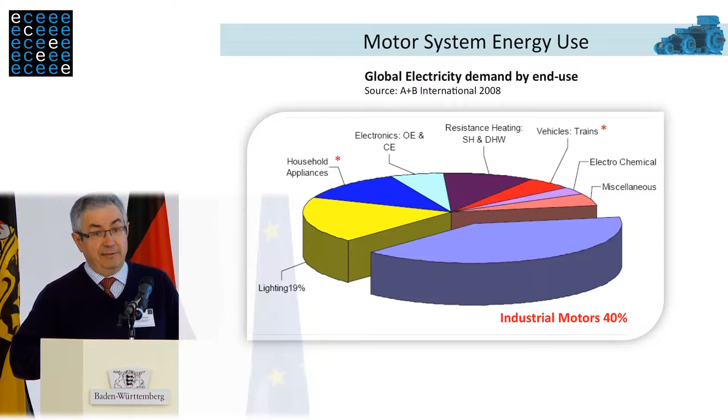Motors are one of the most important types, if not the most important type, of electricity consuming equipment. Industrial motors in industry and in buildings consume about 40% of all the electricity which is generated. And if you take into account appliances like refrigerators, air conditioners, heat pumps, the electricity converted by motors is well over 50% of all the electricity generated.

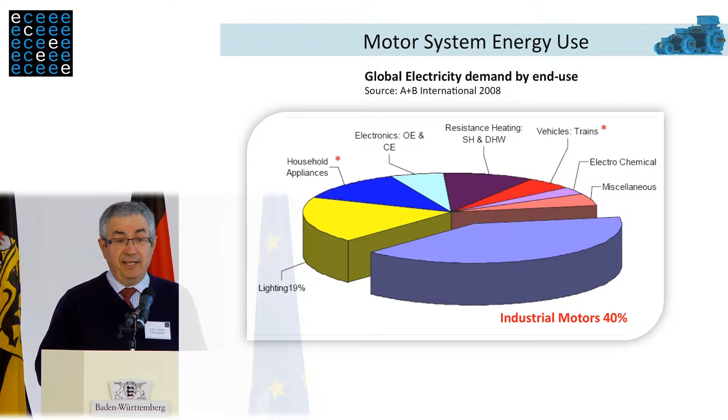Also in transportation, trains, but also other forms of transportation, are moving more and more to electric mobility, since the internal combustion engine is a dinosaur compared with the electric motor in terms of performance.

In industry, motors are not used alone. Motors are equipment which converts electrical power into mechanical power, and this mechanical power is used in a wide variety of processes to move fluids in pumps, fans, and compressors, for processing materials like in mills, mixing machines, for materials handling like conveyors, like cranes. So a huge variety of equipment is driven by electric motors in industry, and roughly speaking, about 3/4 of the electricity used in industry is used by electric motors.

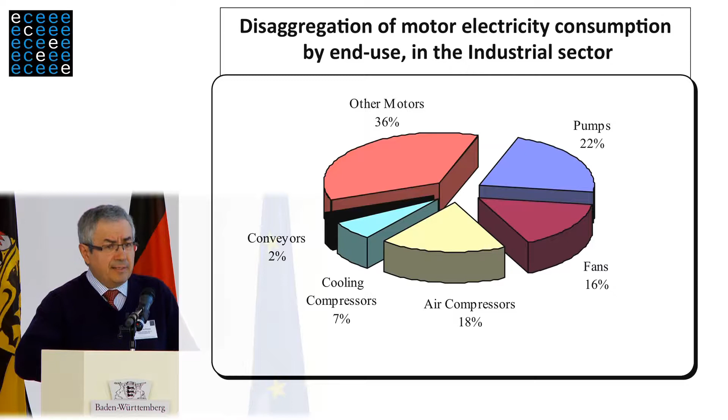Even in buildings, the so-called tertiary sector, electric motors use about 1/3 of the electricity consumed, as electric motors are used in ventilation systems, in air conditioning, in elevators. So they are still quite relevant in pumps for central heating systems, refrigeration. Not so relevant as in industry, but still quite relevant.

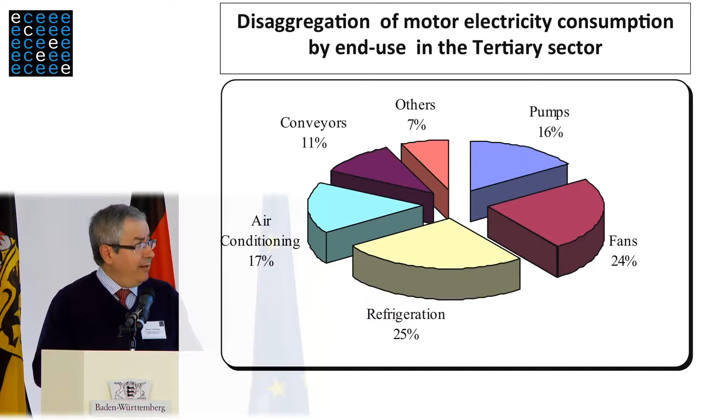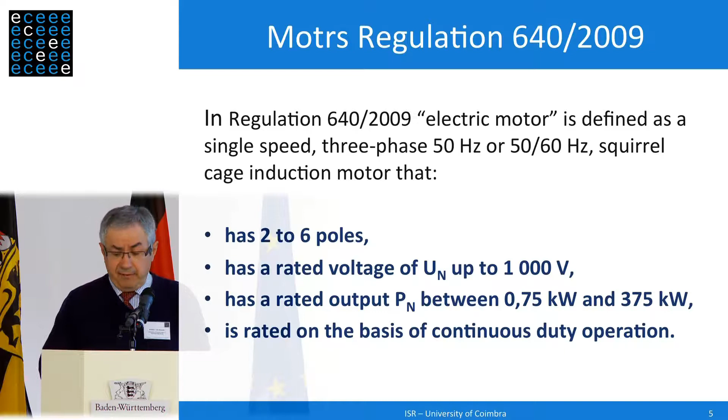In terms of eco-design regulation, in 2009 motor regulation was enforced in Europe, basically to correct a situation associated with the use of poor and medium efficiency motors in the European market. This regulation addressed the most common type of motors in industry, single-speed induction motors in a range from 0.75 to 375 kilowatts. And this regulation is working quite well, as I will say later.

Right now we are completing a study for the European Commission, which has the final meeting next Monday, and you are most welcome to attend, although you have to register. We are looking at other types of motors, and we are enlarging the power range. We are addressing motors from 120 watt, because there are many small motors which are relevant for power consumption in the range from 120 watt to 0.75 kilowatt. We are also addressing larger motors, and for the first time we are also addressing electronic controls like variable speed drives and soft starters.

As far as I know, nobody has done this in other parts of the world, to look at efficiency of this type of controllers. So basically, when we are using a motor, we have to look at a wide picture. We have to look at the system which is using the motor as one of its components. It's a very important component, but the performance of the whole system is a function of all the components that are involved. It's like an orchestra.

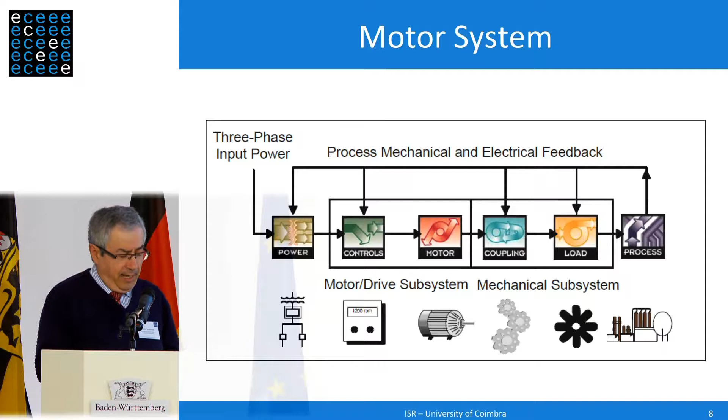So we have to look not just at the motor efficiency, we have to look at the motor speed and torque. Actually, one of the most common mistakes is that users do not take the care to understand the requirements of a particular application. The first part of design of a motor system is to fully understand the speed and torque requirements of the load. Only after this is understood can you start building your system. Many times it's the other way around.

So you have to look at the motor efficiency, of course. You have to size the motor properly. You have to look at the power supply quality, which can influence the behavior of the motor, not just efficiency, but can also drastically affect reliability and lifetime.

To look at mechanical transmission, maintenance, and last but not least, the end-use device. There is a device connected to the shaft of the motor which is performing a useful function, for instance a pump. It's very important that this device at the end of the chain is properly chosen, has a high efficiency, is properly sized, and sometimes other aspects are also important besides these.

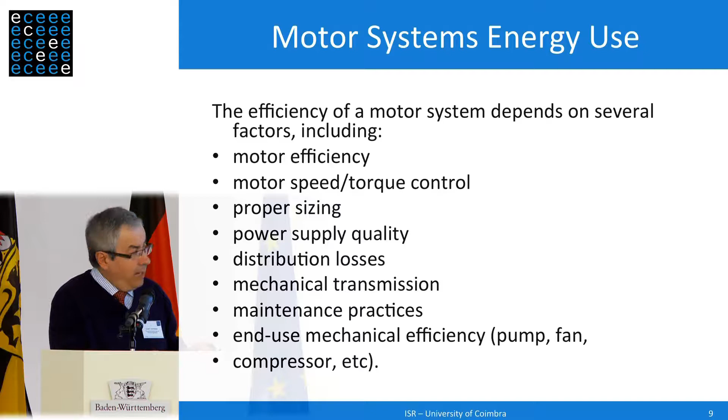This last item, the pipe, can make a huge difference. In many industrial systems you have closed-loop systems, and a large percentage of the mechanical power is lost as friction in the pipe. So if you have a narrow pipe, you are basically destroying mechanical power in the pipe.

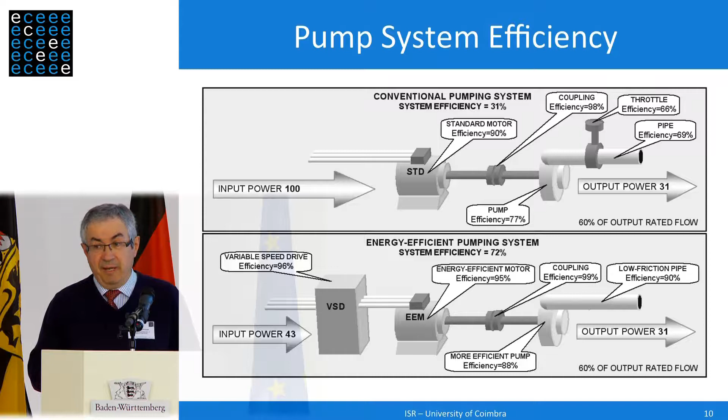So basically you need to integrate all these aspects in a good way. And if you do this, the reward can be quite impressive. You are able to save more than 50% many times when you are able to optimize the system you are addressing.

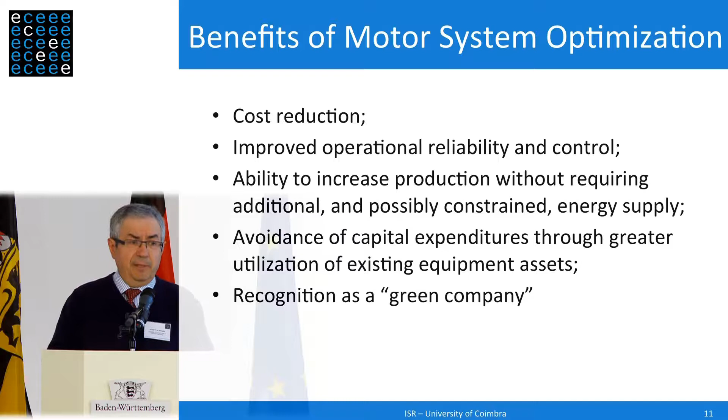The benefits of system optimization go well beyond cost reduction. Of course, if you use less energy, you are reducing operating costs. But many times with energy efficient motor systems, you are able to improve process control, reduce waste, gaining other benefits in terms of quality control, and you are also able, which is more and more important, to gain recognition as a company which takes care of the environment.

So why is this motor systems carrot not enough to drive more users towards this type of strategy? One common barrier, particularly in small companies: large companies have the expertise, but small companies many times lack the expertise. They don't have information.

Sometimes when it comes to new technologies like variable speed drives, they perceive technical and operational risks. Sometimes also within the company there are professional and functional boundaries to support energy efficiency. For instance, in companies some people are responsible for making the investments and other people are responsible for running costs, and this creates a barrier when it comes to making rational decisions. In some countries, not so much in Europe, energy prices are subsidized, so they don't give the proper message to the users.

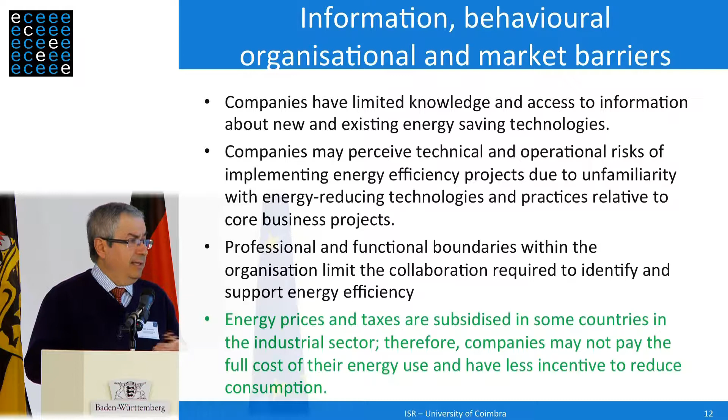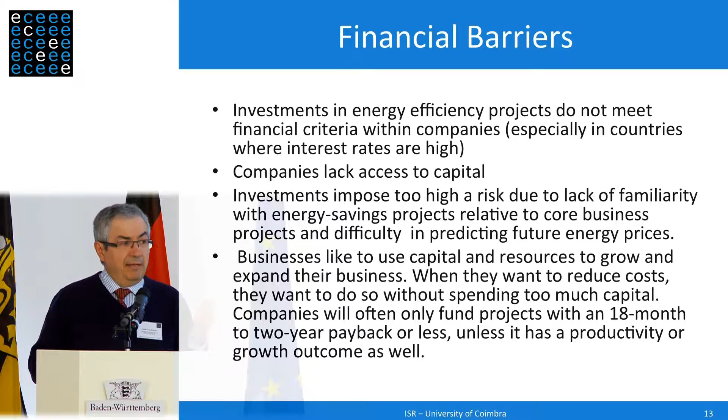Short payback times, in a situation of crisis, lead many companies to take a very short-term approach. If an investment does not have a guaranteed payback, say in 18 months or 2 years, they are not interested, and they put priorities on the scarce capital resources they have available, for instance to increase production rather than improving efficiency.

I was commenting at lunchtime that I think ISO 50001 is a very important tool to overcome this lack of comprehensive approach taken by companies to address efficiency. It's really essential to involve top management in energy efficiency policies in order to guarantee that this business is taken seriously.

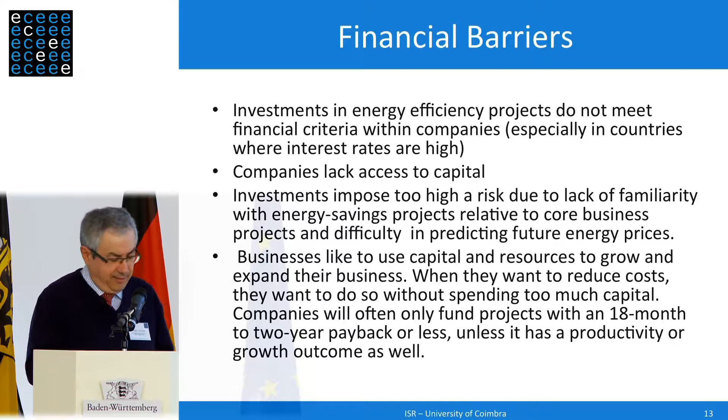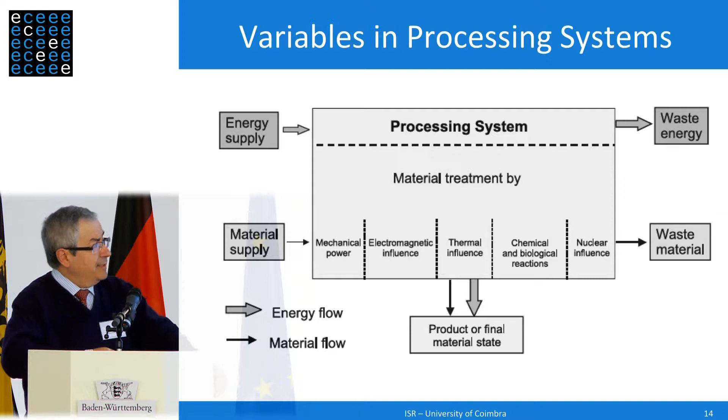So in industries, basically, you have energy flows and material flows, and what is important is to optimize both types of flows. When it comes to energy efficient motor systems, because of the improved process control, you are able to also improve the performance related to material processing - better quality control, reduced waste - these are added benefits from optimization of motor system processes.

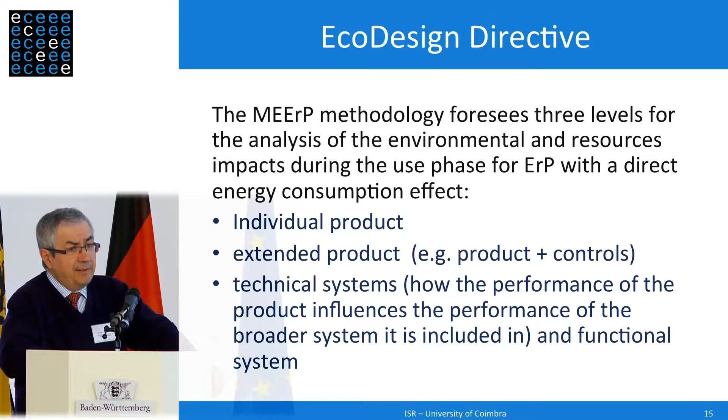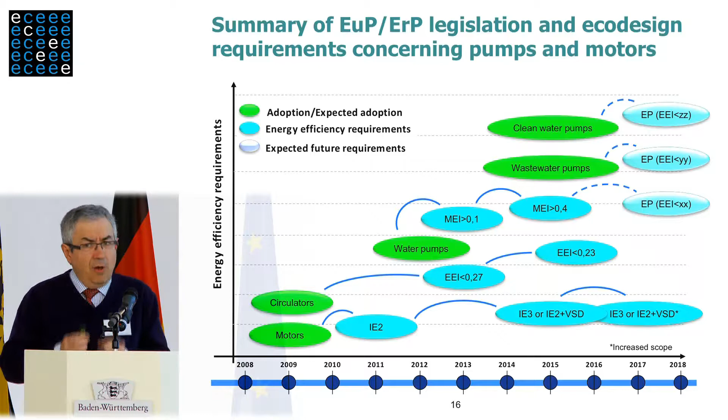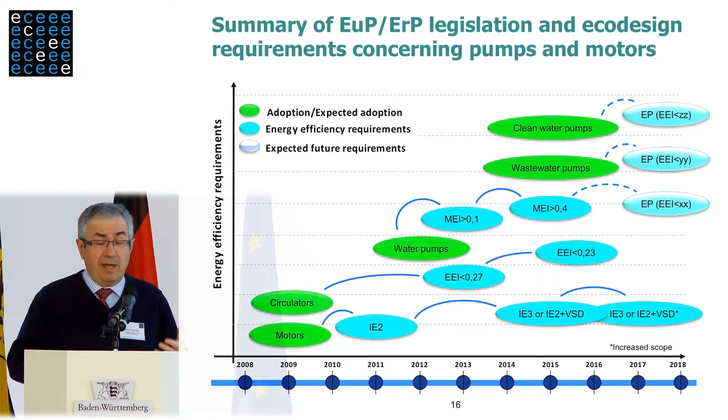The idea is that these requirements are not fixed in time, they are progressively tightened in order to improve the energy efficiency, but in all cases the energy efficiency criteria is driven by life cycle cost considerations. Considering a typical application, a minimum life cycle cost design will lead to a reduction of the costs.

This is the example of the motor situation. Only in 2007 was there agreement worldwide on how motors are tested. This is hard to believe, that only in... Tesla invented the induction motor 120 years ago. So it took 120 years for associations around the world to agree on a testing standard for an induction motor. But in 2007, this was finally agreed.

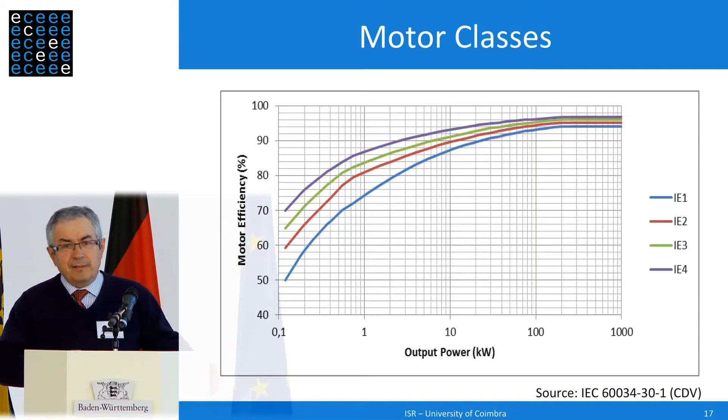After you have an agreement on testing standard, you can then classify motors, so that a motor made in Japan or China with a label means the same as a motor made in Europe. And in the last 12 years, a very drastic transformation of the market happened in Europe.

Basically, before the year 2000, two thirds of the motors sold were below the blue line. In the space of 12 years, we moved from somewhere here to the red line, which is the minimum since July 2011. In 2015, we are moving to the green line. This is a remarkable achievement that happened in a relatively short amount of time.

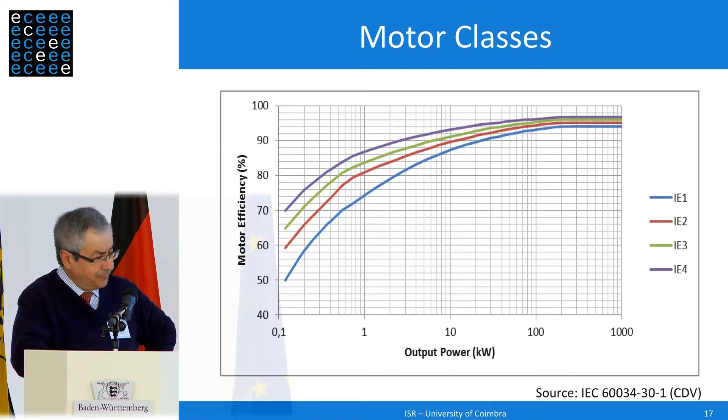In terms of motor technologies, European manufacturers 12 years ago were lagging behind manufacturers in other parts of the world. Now they have at least as good products, and sometimes even better. So this type of market transformation carried out in Europe had a positive benefit, promoting the appearance of innovative products in the European market.

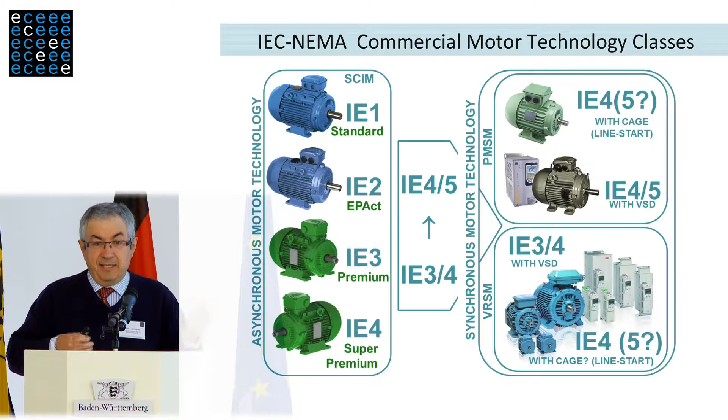I'll give you one situation. Some of these motors, for instance permanent magnet motors, have much higher torque than conventional motors. So in many cases you don't need a transmission, you don't need a gearbox. A gearbox costs money, has losses, and needs maintenance. So with these new, very efficient designs, you are able to do a direct drive system, which is simpler, more economical, and better under several respects.

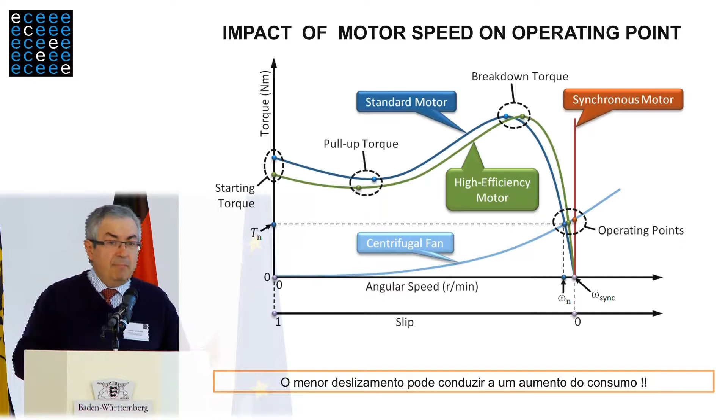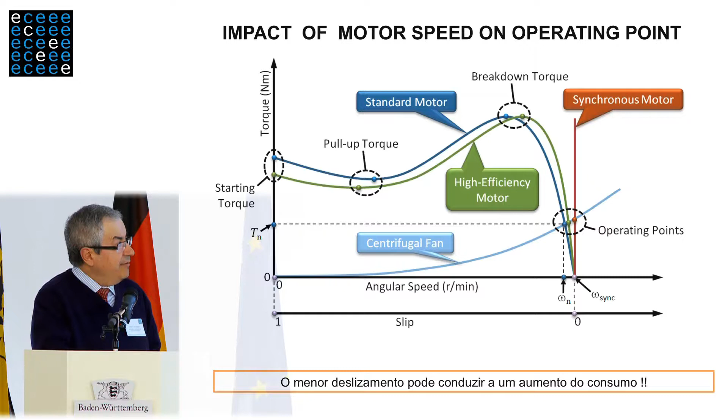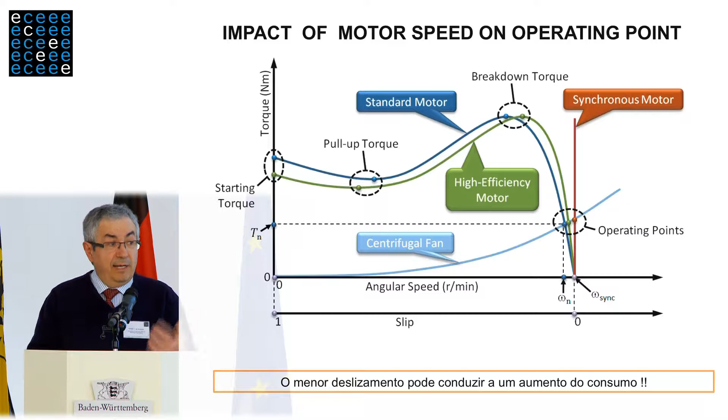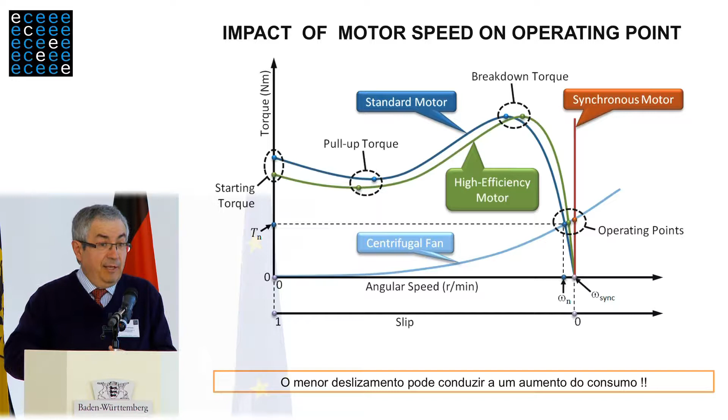Something important when addressing a system is looking at the impact when you are moving technologies. For instance, if you are driving a fan, you have the load curve of a centrifugal fan, and when you change the technology of the motor, the speed changes. It's important to be aware of this impact, otherwise you can negate the savings provided by the more efficient technology. Once you have the more efficient technology, you should be fully aware of what it has to offer - not just make a straight replacement, but find out the consequences, which in general are quite good.

One technology that by itself can have the largest impact in terms of motor system saving is the use of variable speed drives. In Europe we have a power supply of 50 hertz, in the USA 60, but conventional motors are driven directly from the main supply, and their speed of operation is related to the frequency of the main supply. With electronic variable speed drives, we convert AC 50 hertz into DC, and then convert it back into a variable voltage, variable frequency supply.

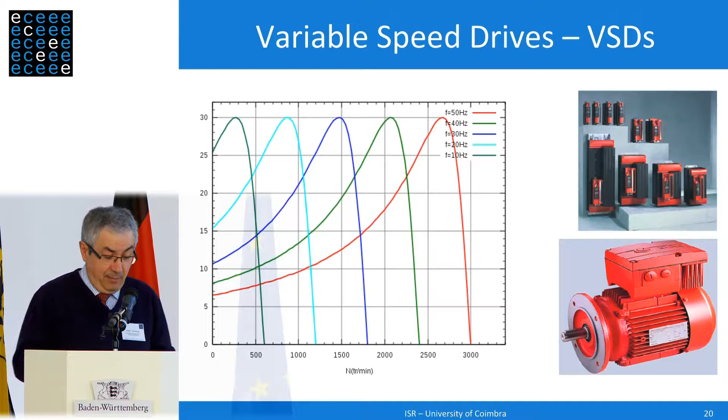By this type of supply, we are able to continuously change the speed of the motor, either to very, very low speeds - for instance, in a steel mill you can have a motor rotating at less than 1 rotation per minute - or to a centrifugal machine rotating at 20,000 or 30,000 rotations per minute. So you gain wide flexibility in terms of speed operating range, in many cases without the need for gearboxes.

One very important advantage of variable speed drives is that they allow you to regenerate power. An application where it's obvious to regenerate power is in the metro, if you are here in Brussels - when the metro approaches a station, the kinetic energy of the metro is regenerated back into energy.

Variable speed drives can also do this. For instance, in an elevator or a lift, you can do the same. So a variable speed drive on a centrifugal machine can do regeneration. In a crane pulling containers from ships, moving containers up and down, when the container goes up you need power, but when it comes down you regenerate the power.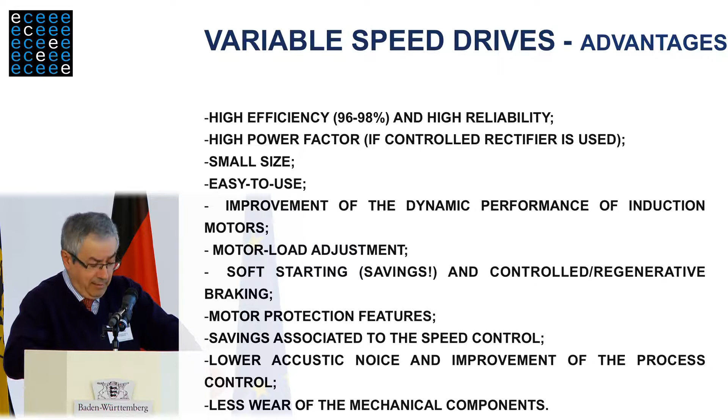So these are some of the features which allow you to improve efficiency. And because you are able to start the motor smoothly, you reduce mechanical wear of the components, giving longer lifetime of the mechanical components and higher reliability, and lower noise. For instance, in a fan, if you reduce the speed, you reduce the noise.

Something very important is how motors and variable speed drives interact - this is called the power drive system. You are connecting two components together, and the interaction between them is something that only very recently deserves attention. Some tests made in laboratories around the world prove that it's important to characterize the way a motor behaves when driven by an electronic variable speed drive.

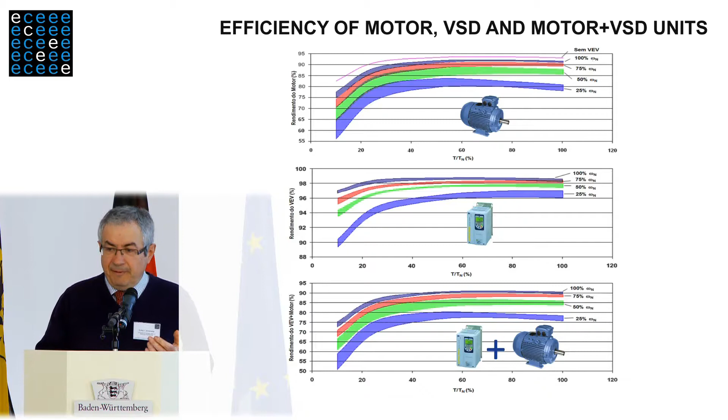You can have a situation in which the same motor plus VSD shows significant differences in efficiency when driven by a VSD made by a different manufacturer. And it's important that a standard is developed, because there is no standard to make this sort of test. Fortunately, this is being done.

So basically, the slide I showed previously is looking at the motor and looking at the drive system - looking at the power drive system. It's important that you are able to evaluate and compare how a motor performs when driven by an electronic controller. This is the power drive system standard, which is right now being developed.

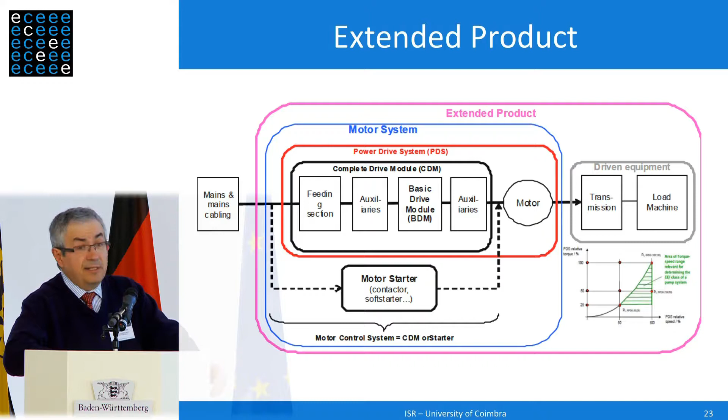But it's important also to consider when this power drive system is combined with a transmission plus a load, say a pump or a fan - this is called the extended product. So this is the methodology that is being more and more addressed when dealing with motor systems. First you address the power drive system, and then you address the extended product, which includes the end-use product.

CENELEC, the standards organization in Europe, has now received a mandate from the European Commission to develop a standard for evaluating the performance of motor plus drives. This is a very complex issue - the draft standard is more than 300 pages long.

One key issue important to assess the performance of a power drive system is to consider the energy efficiency indicators, typical energy efficiency indicators of motor-driven applications. Because when you come to motor systems, one barrier is that all applications are different, and you may reason that since all applications are different, we cannot do any reasoning. That's wrong - it's the same as a person saying, I'm not going to buy a fuel-efficient car because I don't know how many kilometers I'm going to drive.

So, on average, it's possible through the stakeholders and industry associations to identify typical operating profiles in terms of number of operating hours and load distribution. For instance, if you have a pumping system, you can say that 50% of the time it's working at 70% of the flow, 25% at 50% of the flow, and so on. So it's possible to come up with indicators typical of many situations to assess the operating merits of the power drive system.

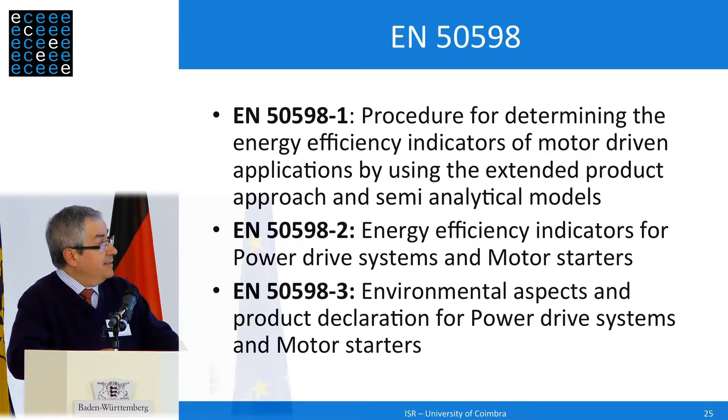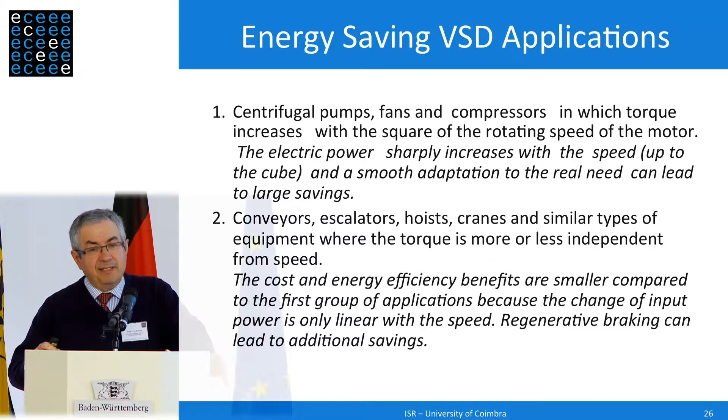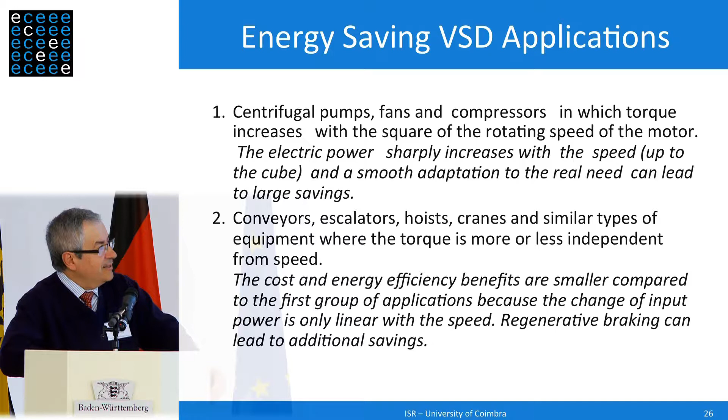So in terms of energy saving applications of variable speed drives, pumps, fans, and compressors are the most relevant. Fortunately, pumps, fans, and compressors represent 60% of all motor applications, so we can say that the most relevant motor applications can benefit from variable speed drives. But other applications like conveyors, escalators, and cranes can also benefit from this type of technology.

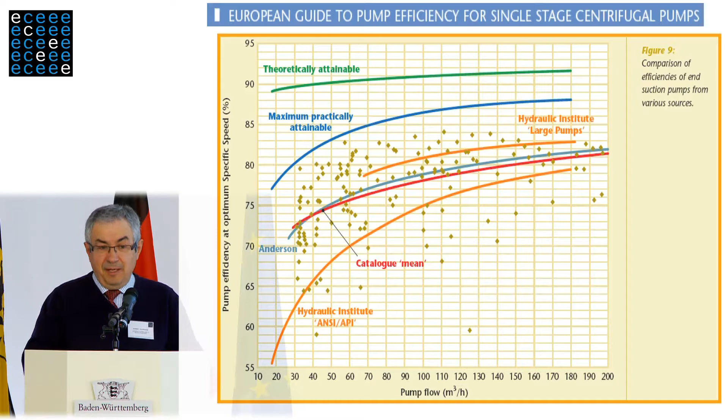This was the situation identified 10 years ago with pumps. This was a database built by the Joint Research Center, and we see for the same flow we have differences in efficiency going up to 10%. So this identified the need to develop pump efficiency standards.

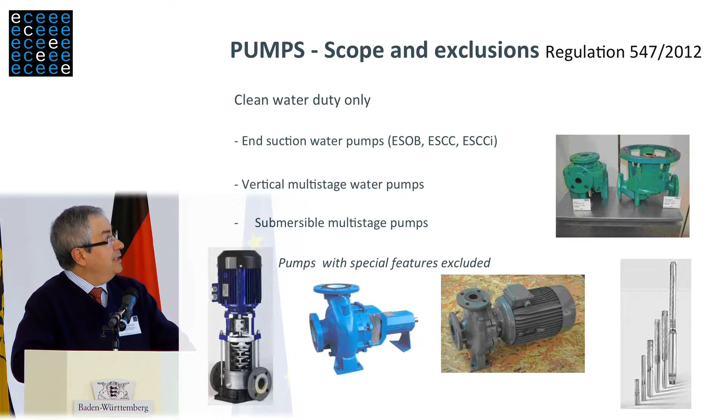These new regulations address clean water pumps and circulators as well. There is new regulation being prepared to extend the scope of this regulation because pumps are so important.

With pumps, something also very relevant to know is that the pump efficiency is strongly dependent on the operating point. So it's not just enough to select an efficient pump. It's extremely important, essential, that you are able to design the system so that the pump is close to the best operating point. Otherwise, you are wasting your money.

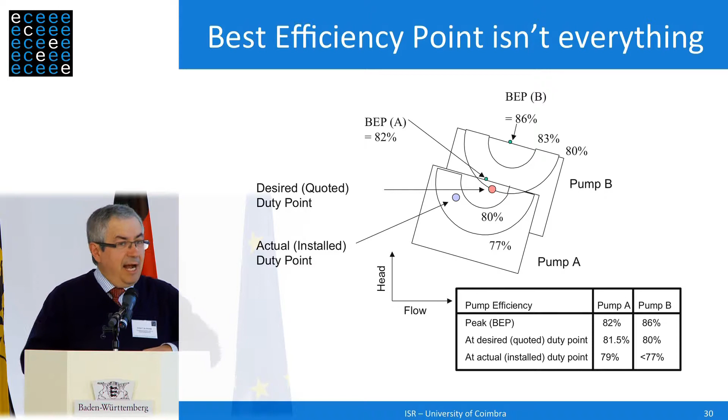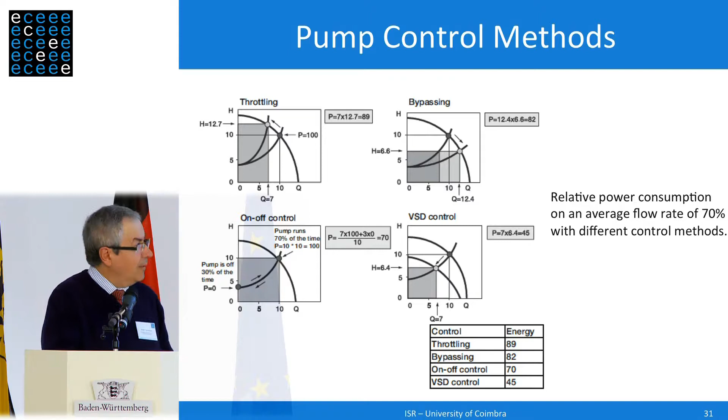Circulators is a success story. Circulators is an example of an integrated product. Basically, in energy efficient circulators, you have an energy efficient motor, the pump, and the electronic speed controls, all integrated in a single unit.

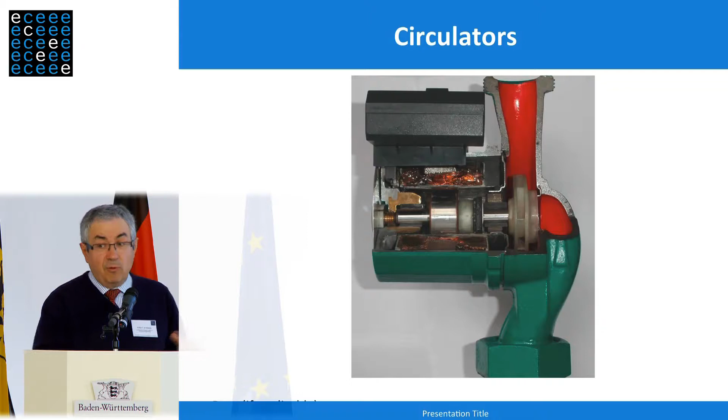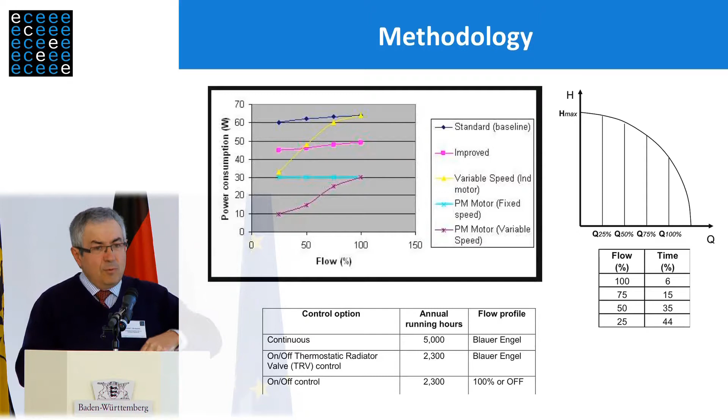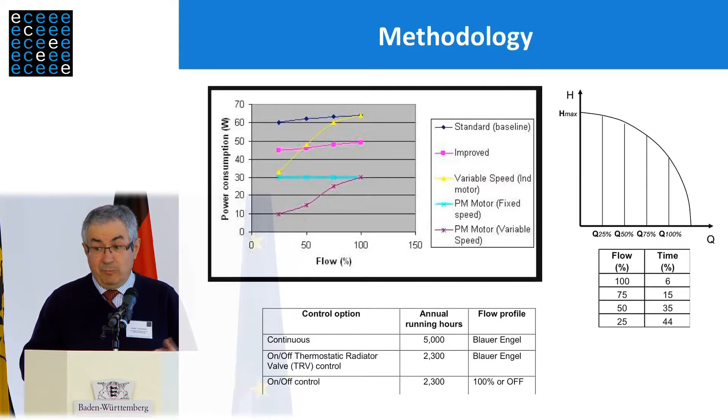This was an area in which the existing situation in Europe was extremely wasteful. The efficiency of conventional products was as low as 10%, meaning only 10% of the electric energy going into a circulator was converted into mechanical power by the pump. With the new integrated circulators, it's a very successful story, able to save several power plants' worth around Europe just by replacing old circulators with this new integrated product.

The Europump Association was supposed to be here today, but they are not. Europump is taking this subject into consideration, and they are addressing the extended product approach.

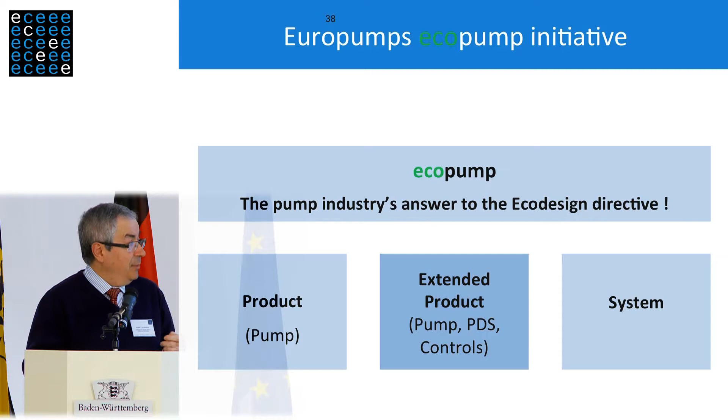They will be coming with a methodology to assess the extended product system, to consider the performance of the pump, the electric motor, plus the controller—like the circulator, where we already have an integrated product.

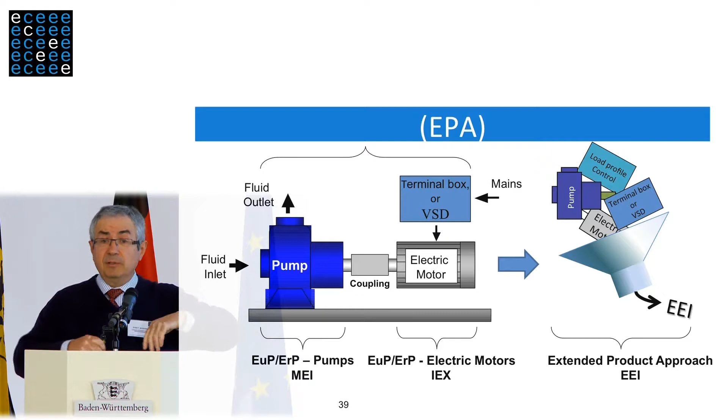Even when you don't have an integrated product, it's possible to have a methodology able to address this type of situation.

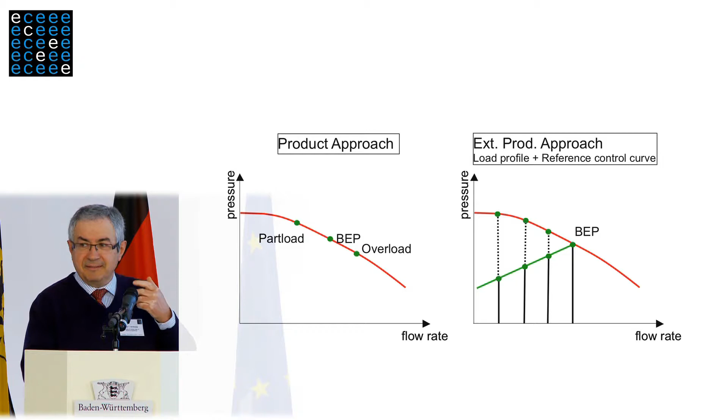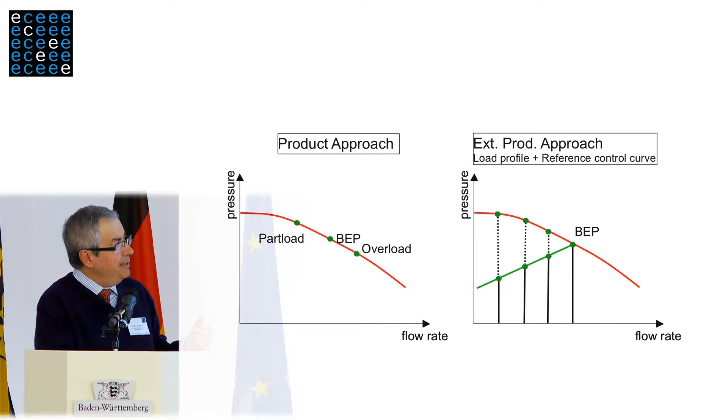Also very important for this extended product approach is the possibility of defining a typical load profile and reference control curve in order to be able to assess the performance.

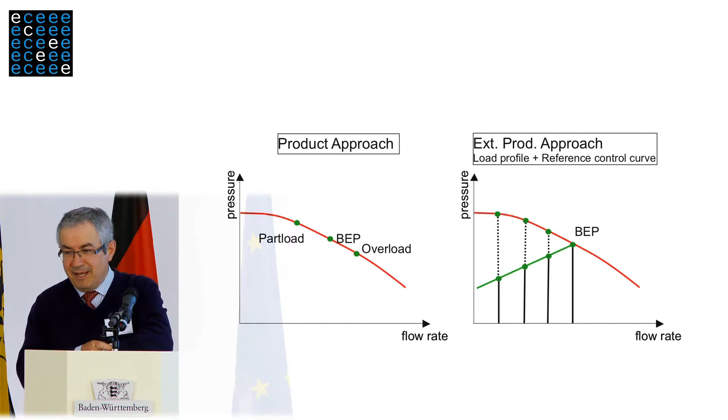So with fans, it's the same situation.

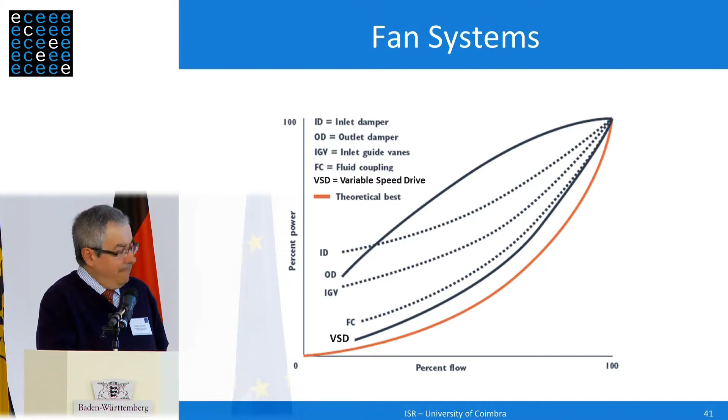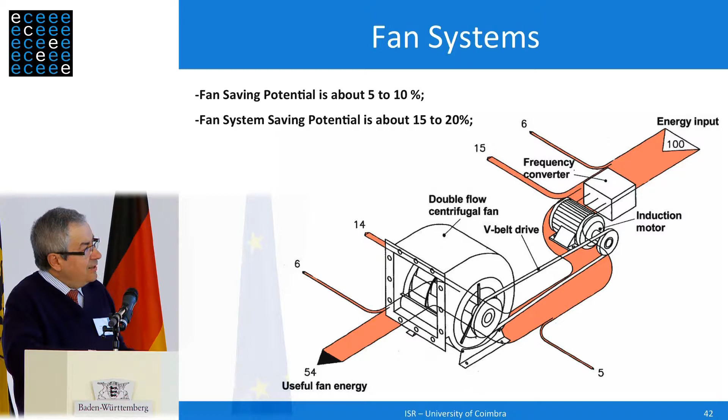Replacement of inefficient throttling devices by variable speed control can provide huge power savings. Again, when addressing a fan system, you have to consider the motor, use an energy efficient motor, an energy efficient transmission, and an energy efficient fan.

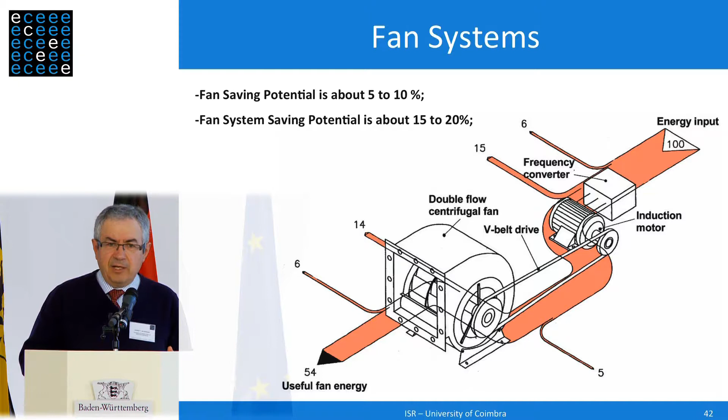Some fans are a horror story. Fortunately, there is already regulation regarding minimum efficiency for fans. The Commission considered a fan with the same power, with forward curved centrifugal fans—the maximum efficiency is about 44%. If you go to the backward curve, you go from 45 to 62%.

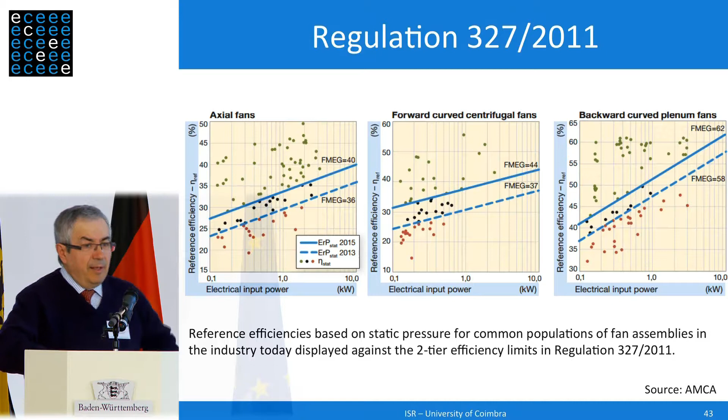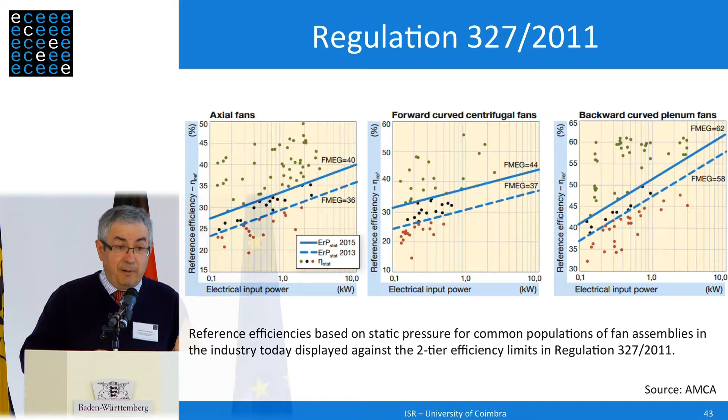Why are such bad fans used? Because they are cheaper and more compact, so designers like to use them since they take up less space and cost less. But of course, in the long term, this is not a good design. So it's important to address this, and we already have regulation in Europe addressing fan efficiency from 125 watts to 500 kilowatts.

Compressed air systems, same story—it's also a system. There was a study made in Europe about 12 years ago, looking at 50 industrial systems, and the most important loss in compressed air systems was leaks. Something as basic as leaking air was responsible on average for 16% of the consumption of the compressed air system.

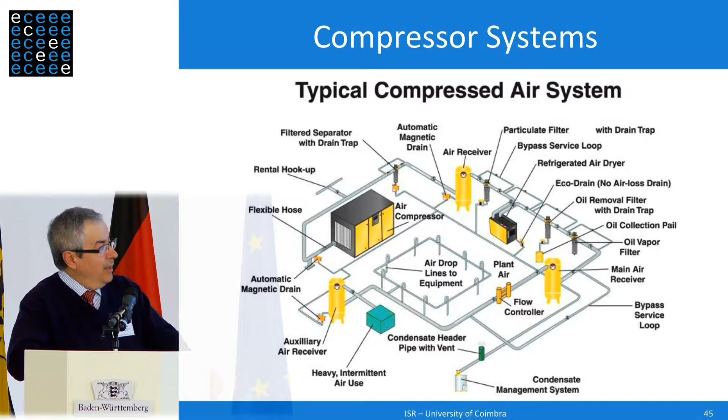It was not something sophisticated, leaks. In some industries, leaks represented up to 50%. So it's not enough to buy an energy efficient compressor if you have a poor network. Again, the optimization of the compressed air system requires an integrated approach, looking at all the key elements of the system in order to minimize energy consumption.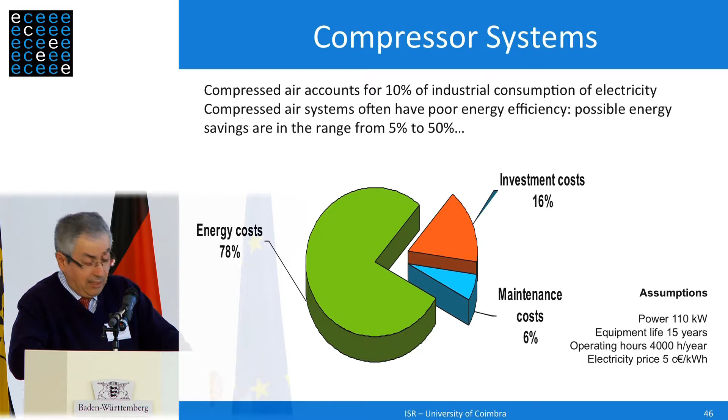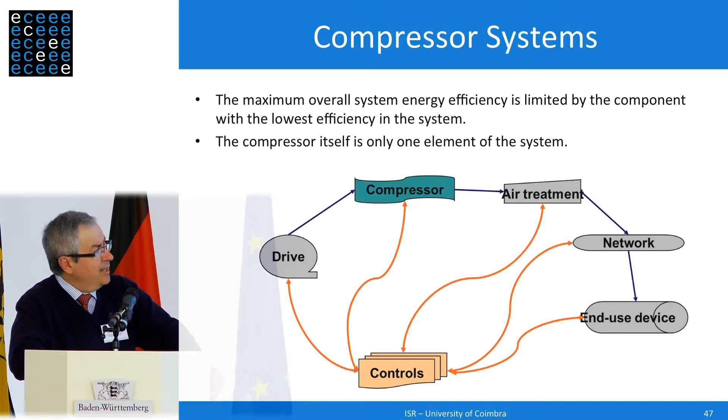In a compressed air system, the energy costs, in a life cycle analysis, are dominant—almost 80% of the total costs. So the optimization of compressed air systems is quite important, since compressed air on average represents about 10% of industrial electricity use. It's one of the key applications that deserves to be addressed.

Other applications from VSDs: if you have a conveyor belt transporting material, you can save energy. If you are not transporting at full flow, you can save. If you are only transporting 50% of the load, you can save 50% of the power. Power is proportional if you change the speed to the material flow.

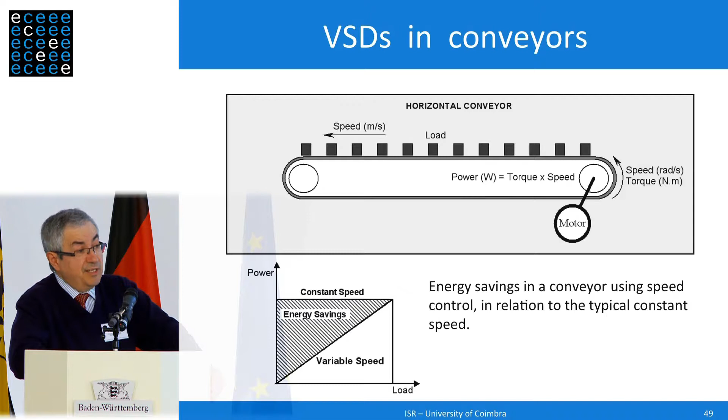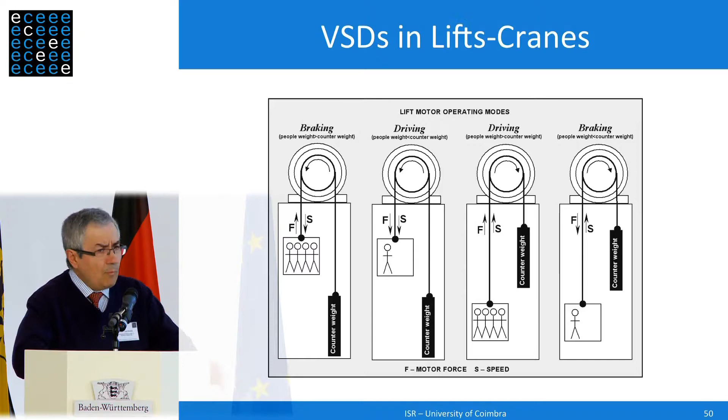Elevators, cranes, it's the same technology. In a conventional elevator you have an induction motor and a mechanical gearbox. In a state-of-the-art elevator, you have a very efficient permanent magnet motor, no gearbox, able to do regenerative drive. What you are able to achieve is a reduction of 80%. It's not a mistake, so the energy consumption is reduced by a factor of 5 in a crane or an elevator using this technology. So it's quite impressive, the savings that you can achieve with energy efficient motor systems.

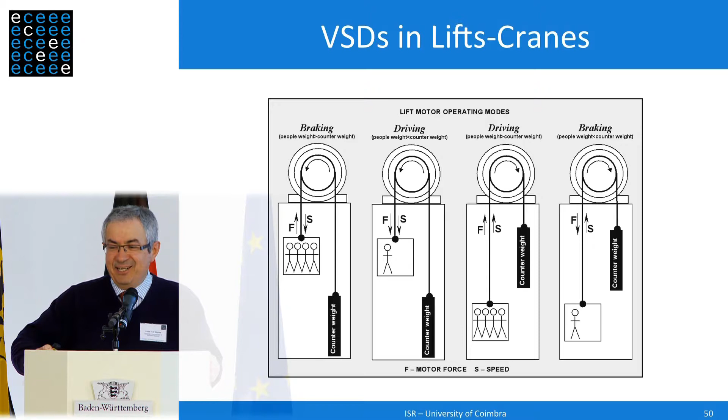Thank you for your attention.